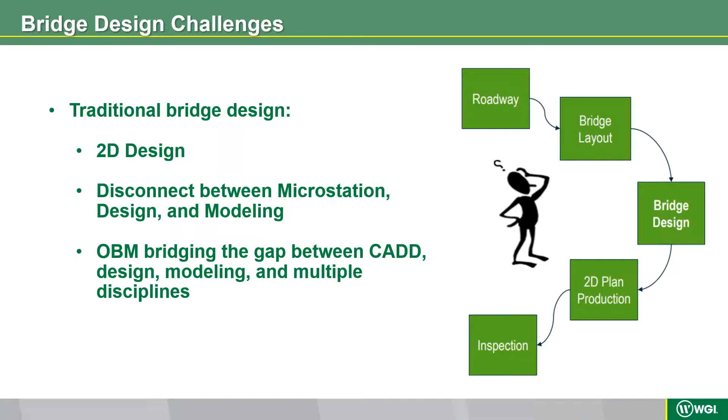The obvious disadvantages of this approach are that there is multiple manual data transfer with roadway and other disciplines, and repetitive data entry between numerous design calculations, spreadsheets, software, and plans. With this iterative process, there is no quick or efficient change management when horizontal or vertical geometry is updated. There are translation issues between CADD, modeling, and design calculations, and there is virtually no automation for CAD production or design.

So OpenBridge Modeler, or OBM, looks to remove the disadvantages I previously discussed and enhance the bridge design process by continuously exchanging project information from initial geometry all the way to final design. This exchange of information includes horizontal and vertical roadway geometry, bridge geometry, and it even includes beam strand patterns and bridge reinforcement. This all-inclusive approach looks to improve decision-making processes. OBM helps streamline real-time collaboration between disciplines, as well as sharing, reusing, and repurposing existing data to minimize risk of design errors, as well as helping to identify construction issues.

The advantages of OpenBridge Modeler are that you're able to leverage existing MicroStation tools such as GeoPak and coordinate geometry. There is automatic horizontal and vertical data transfer between roadways, structures, drainage, and utilities. There are seamless and continuous updates when parametric data is changed, supporting efficient change management. I'm going to be specifically discussing that point later in the presentation.

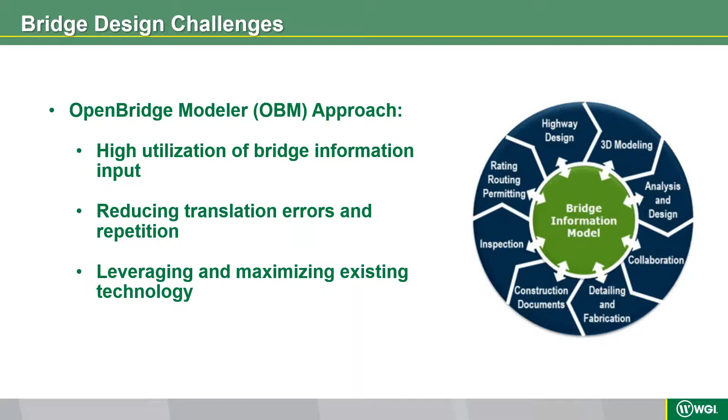You can view your bridge layout in context of the true world. There is intelligent connection to design and analytics, including bridge design, rebar layouts, strand patterns, and vertical clearance. You're able to reuse existing data as well as repurpose that data for additional analysis. All these advantages increase efficiency, which saves time and money.

So these images represent the easy-to-use and intuitive interface of OpenBridge Modeler. This interface is similar to MicroStation and AutoCAD in that the ribbons and toolbars can be customized to meet whatever your preference is. We will discuss some of the primary design analysis and reporting tools, such as input report, create drawings, quantities report, and clash detection. We'll also talk about some of the parametric definitions used to create substructure and superstructure templates.

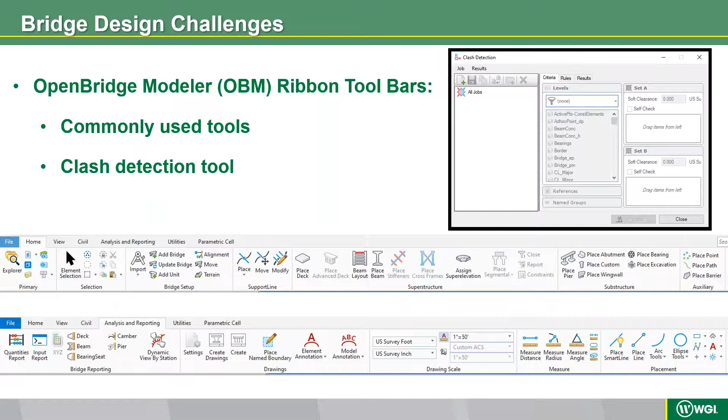Another important tool we will be discussing is the clash detection tool shown in the top right image. The bridge clash detection tool helps mitigate risk by performing conflict analysis between the bridge and proposed or existing infrastructure, which saves time, helps eliminate errors, and reduces project costs. You can view clashes in 3D or in a table format, which can be a helpful tool used to check the model as well as perform quality control and assurance. This tool will also detect clashes with reinforcing steel and other embedments, as well as checking setback and vertical clearance requirements. And again, we will be talking specifically about the clash detection tool later in the presentation.

Throughout this presentation, we will continue to discuss OpenBridge Modeler and its capabilities. But first, I'd like to introduce you to Bentley's latest software, which includes OBM. This software is called OpenBridge Designer, or OBD.

OBD consolidates the modeling capabilities of OpenBridge Modeler and the analysis and design features of LEAP Bridge Concrete, LEAP Bridge Steel, RM Bridge, RM Bridge Advanced, and RM Bridge Enterprise to meet the design and construction needs of all types of bridges. With OpenBridge Designer, you have the advantage of using a single comprehensive package from beginning to end of any bridge design project. You can use one product to create an interoperable physical and analytical model for both steel and concrete bridges that can be utilized throughout the life cycle of the bridge.

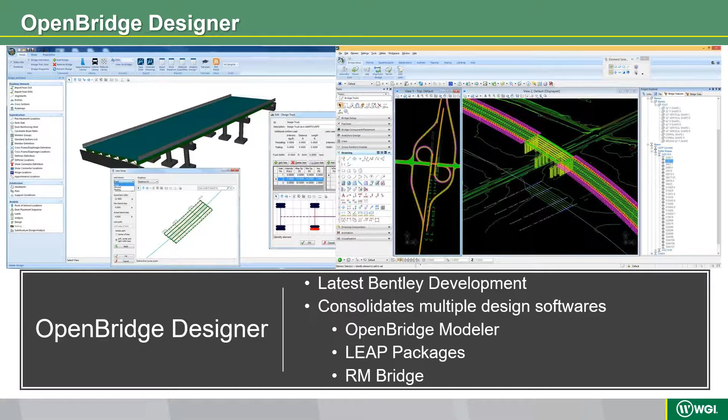The image on the left depicts the design, analysis, and rating of a typical bridge. These programs leverage existing MicroStation tools and interfaces. This is done by reusing civil data obtained directly from Bentley road products such as Geopak, Bentley InRoads, or MX Road, and import roadway information and ground data from XML files. The image on the right displays the capture of roadway geometry and topographic features, similar to the Polk Parkway slides that David will present in a few minutes.

The first thing you'll do when working in a new project is create an OpenBridge Designer file. This file will contain the OpenBridge Modeler files, LEAP files, drawing files, graphics, etc. Once you create a new OBD file, you will choose if your project files will be BIM workflow or standalone. A BIM workflow project must be done in the order of modeling the bridge in OBM and then exporting that bridge from OBM to LEAP.

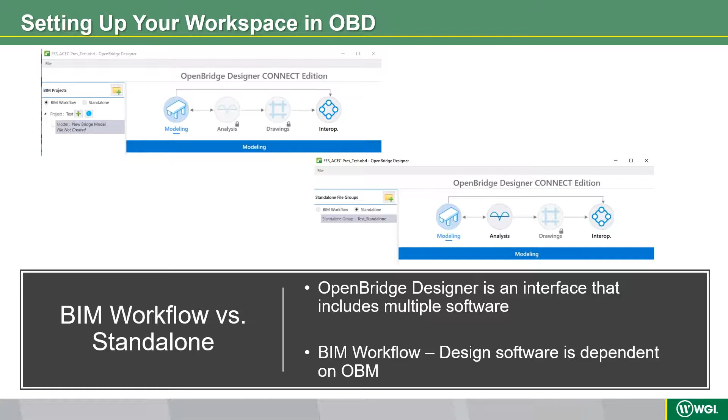Alternatively, in a standalone project, OBM and LEAP can be completely independent of each other, where you can model your bridge in OBM or directly in LEAP. Notice in the bottom screenshot that the analysis button is accessible. You still have the capability to export between both OBM and LEAP, but you don't have to keep the two connected.

Thanks, Callie. So one of the projects where we really got to kick the tires on the software, run it through the paces, and try to use almost every feature of OBM applicable to us is the Polk Parkway Design-Build pursuit. This is one of the example projects we're going to talk about, and this was a pursuit for Florida's Turnpike. We were able to utilize OBM in several different ways, from graphics to design to analysis. OBM allows you to quickly and efficiently develop renderings for LOIs, LORs, and technical proposals.

On this project, we modeled a two-span bridge with skewed substructures utilizing the existing MicroStation tools like Geopak and coordinate geometry. We used OBM to develop our structural quantities by using the bridge reporting tools. OBM can develop various types of quantities like multiple classes of concrete and rebar. You can also use it to develop independent cost estimates by manually setting the cost of the quantity. On this job, we used the FDOT area historical costs and compared prices against the historical statewide averages.

We also used OBM to perform vertical clearance checks using the clash detection tool within OBM. On this project, we were able to utilize one of the unique features of OBM, and that is the ability to use pier or foundation templates developed from previous jobs. I will talk about this feature in more depth in a couple of slides. OBM is fully integrated with ProjectWise, which is a good tool to support distribution with other project teams.

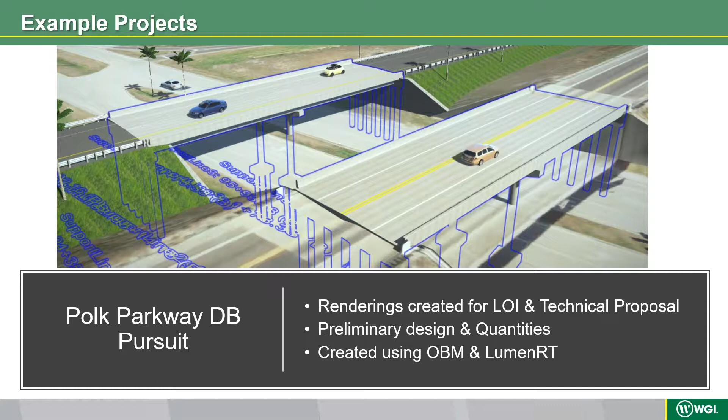One of the big questions we typically get is, how do you check your models? We found several different ways to check and QC 3D models. On this project, we used a bridge reporting tool to print the input report for check and QC of the bridge geometry and design. We also performed a visual review to assure no gaps or holes within the model, especially at the roadway and bridge interface.

It is important to note, in order to develop graphics like the ones previously shown, you must have existing or proposed elevation information. You will use the existing aerials of the surrounding area and drape them over the existing vertical data. Once you've draped the aerials over the DTM, you can export the model to a graphic software program to put the final touches on your graphic. You can add features like different vehicles, landscaping, lighting, and even choose your ideal weather conditions.

Graphic software may be time and computationally extensive and not available to everyone, so another way to develop similar graphics and get the real-world context of your bridge is to save as or export your bridge to Google Earth as a KML. Be sure to set your bridge to the correct geographical coordinate system, or else your bridge may end up in the middle of the ocean. There are also some vertical translation issues between OBM and Google Earth, so you may need to adjust your model vertically. And again, DTM or existing survey information is needed for modeling existing bridges.

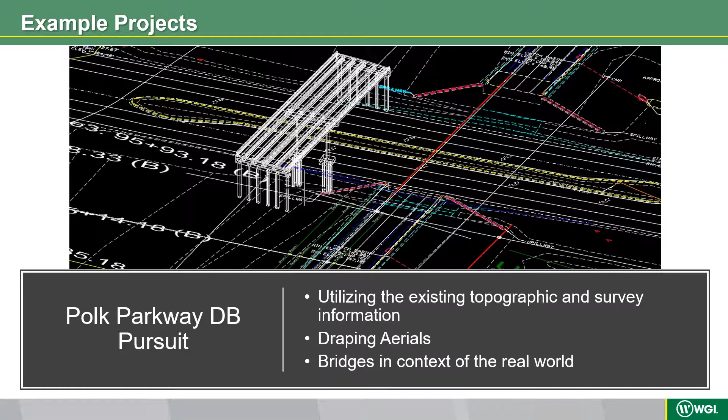On this project, we wanted to analyze a couple different span arrangements as well as vertical profiles. Every change of the vertical geometry has an effect on the superstructure and substructure, as well as the designs of the remaining bridge elements. With each change of the vertical profile made by the roadway engineer, the OpenBridge model handled that change seamlessly, and it also carried that change through to the design software like Callie was talking about earlier.

However, it is important to note that your bridge must be set up using the parametric definitions, or else any updates will not be automatic and will require manual adjustment. Once you've defined the bridge elements in relation to the alignment, the model will update the remaining bridge elements automatically. On this project, the changes were immediate, which obviously increases our efficiency and requires less intensive coordination between structures and roadway.

Another tool shown in the left image was the pier templates. Pier templates allow you to develop substructures quickly and efficiently. This multi-column pier had been defined on a previous project and imported into this bridge model and site adapted. Template-based definitions are simple and easy to use and allow flexibility as you move from job to job. Templates can also be applied to beams and decks, which help when the roadway engineer will make changes to the cross slope or super elevation transition.

Another good feature of this program is highlighted in the image on the right. Originally, the bridge substructure was modeled perpendicular to the superstructure in the proposed Polk Parkway, so there was no skew. However, the decision was made to match the adjacent existing bridge, so we decided to skew the substructure to be parallel to the existing roadway underneath Polk Parkway. We made this decision after the model had been developed.

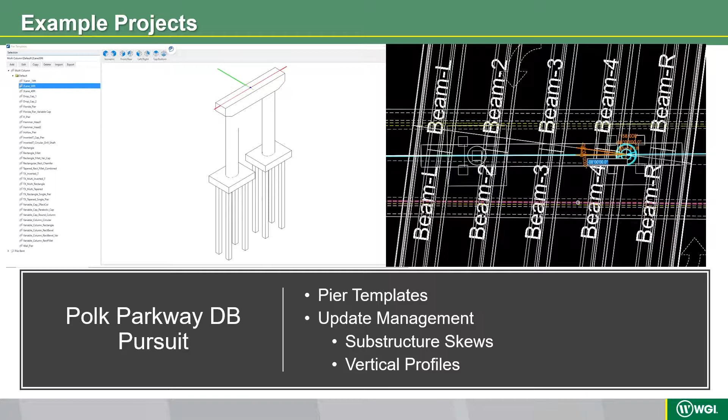Another important note is that when we were modeling the bridge, specifically the bridge superstructure, due to the symmetry of the bridge, we were able to use the Copy To tool to copy superstructure definitions to the remaining span.

Quantities, cost estimates, and bids are an important element of design-build pursuits. OpenBridge Modeler has the capabilities of reporting accurate quantities and quickly turning those quantities into a cost estimate. When you complete your bridge model, you will be able to get the quantities based on your defined superstructure, substructure, and foundation. The quantities report is simple and easy to use.

This tool can be used to evaluate multiple substructure and superstructure alternatives based on your bridge model. You can compare different span arrangements with the click of a mouse. The steps are easy. Once your bridge model is complete with parametric definitions, go to the Analysis and Reporting ribbon, click Quantities Report, and then once within the report, you can import previously defined report formats, or you can define your own format. Once you've settled on a format, simply select your bridge or a unit of the bridge and click Submit. A report will be generated within seconds based on your selections and bridge model.

This report can be used as a quick check on your model. For example, if you have an overly high concrete quantity or there is an outlier in the quantities, then you may need to review your bridge model. The report can also be used to develop quantity plan sheets or be submitted as a standalone deliverable. Currently, OBM does not quantify rebar. However, you can export the report to Microsoft Excel and insert a rebar ratio to complete your cost estimate.

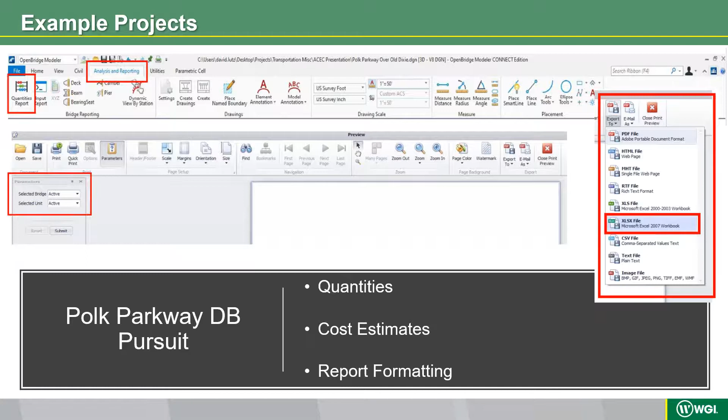The cost analysis tool is very helpful with predefined unit prices. However, there are many instances in which you will want to change the unit cost to get a more accurate cost estimate. There are several ways to change the unit cost, and I've highlighted two here. One way to change the unit price is to export the quantities to Microsoft Excel. In Excel, you can change the unit prices within the individual cells and update the total cost formula to get a more refined total cost. It is important to note that when you export the report to Excel, it will only export as numerical values and will not have any formulas within the Excel. So you will need to update that, and those will have to be user defined.

The second option is to go into the material library and change the unit price within the material library. Once changed, you can save that library, and you can also use it in the future. You can also import a materials library from one that you defined on a previous project or has your unit costs already built into it. And you can also export those as an XML. This is helpful if you're interested in modifying other material properties of the bridge element. As you can see there, if you want to change some of the other beam properties, structural properties, this is where you can do that.

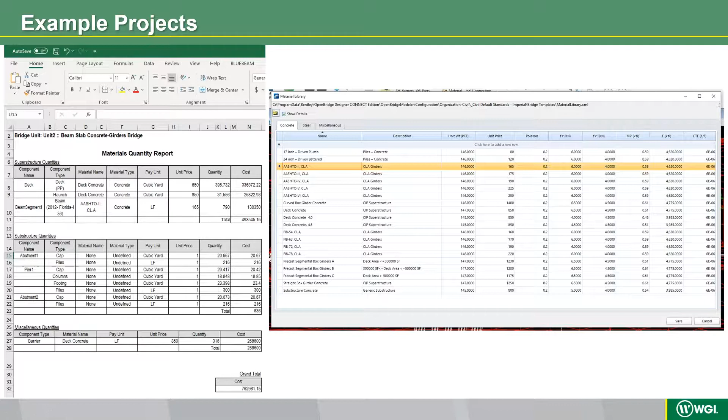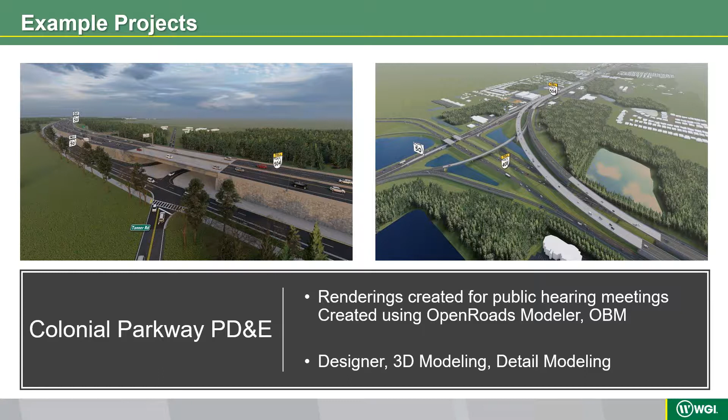Another example project is the Colonial Parkway PD&E. WGI was hired to do the renderings and animations for the preferred alternative of this entire job. We constructed a model that spanned 12 miles and included all the proposed and existing features of the corridor. This is an example of a fly-through of the job. This video spans the first quarter of the Colonial Parkway and has live traffic. In this video, you can see that we modeled all the existing buildings and landscaping.

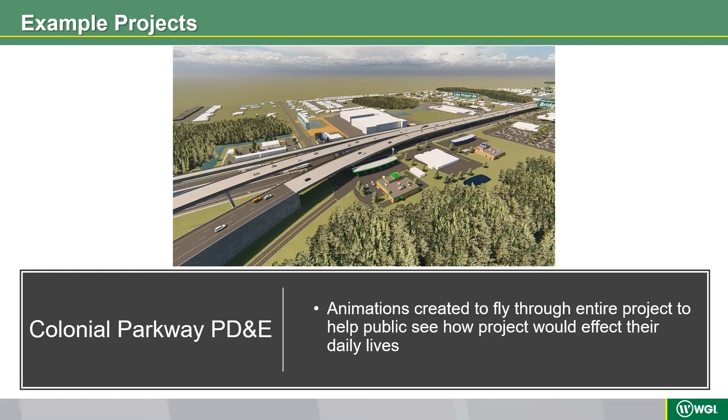We coordinated with multiple divisions to bring this model to life. OpenRoads Designer and OpenBridge Modeler were utilized to bring all facets of the job together. After this video is concluded, I'll go into further detail about how each of the components were brought in to create a master model with all disciplines.

This animation was used for a public hearing to show how the project would impact the daily lives of the public. People could find their street and/or house if they were close enough and see if the project would affect their daily driving pattern. We were given positive feedback from the public saying that this made the project much clearer to them than the roll plots that were arranged around the room did. Animations such as this one will increase public engagement and help answer questions visually. This technology has not only already proven itself useful, but will continue to be very important and beneficial moving forward with social distancing.

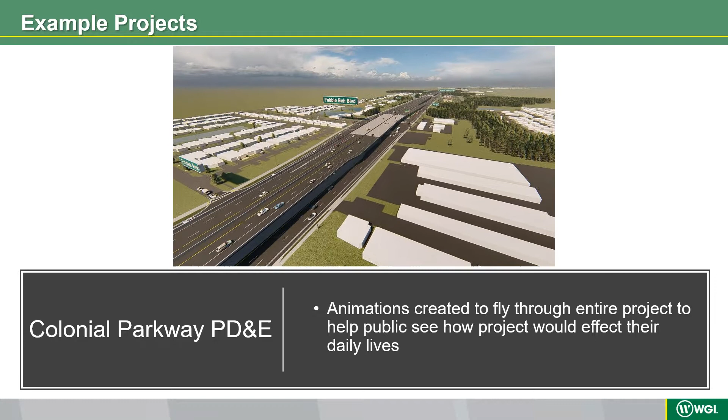The first step in the Colonial process was to use OpenRoads Designer to create the 2D plans, and then use corridor modeling to create a 3D model. Corridor modeling consists of creating templates, which are basically typicals. These templates are then extruded along the alignment and profile to create the 3D model of the roadway and its elements. With these templates, we can model the entire roadway, barrier walls, MSE walls, guardrails, and more.

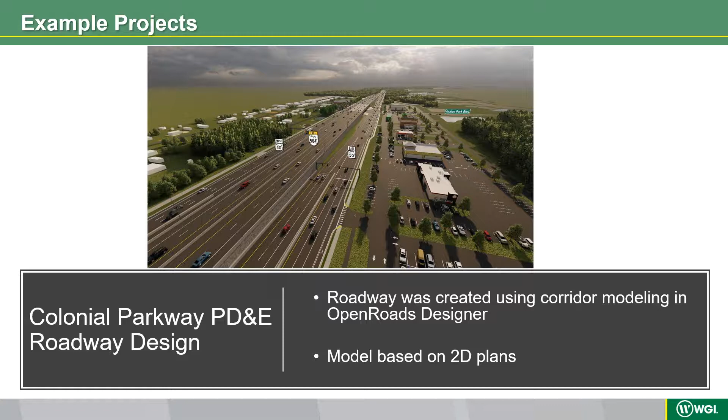OpenRoads has a quantity component tool similar to OpenBridge, which makes it very easy to pull quantities from each corridor and give an estimate very quickly. Similar to OBM, OpenRoads has the capability of tabulating quantities for specific components throughout the project. The second step in the process was to create the bridges, which was accomplished using OBM. Once these bridges were modeled, they were referenced into the 3D OpenRoads model.

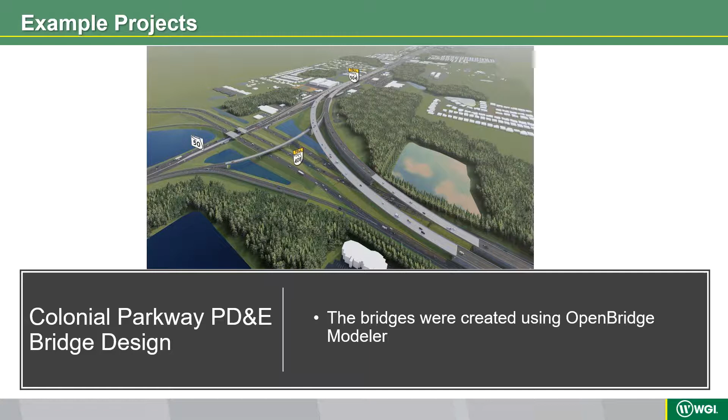The third step was to coordinate with signing and pavement marking division to get their line work and sign locations. The pavement markings were applied using a stencil tool in OpenRoads, which will take your 2D line work and overlay it onto your 3D model. The signs were coordinated to go in the correct location and with correct elevation. All signs were created using guide sign software and manipulated to appear on the sign panel in 3D.

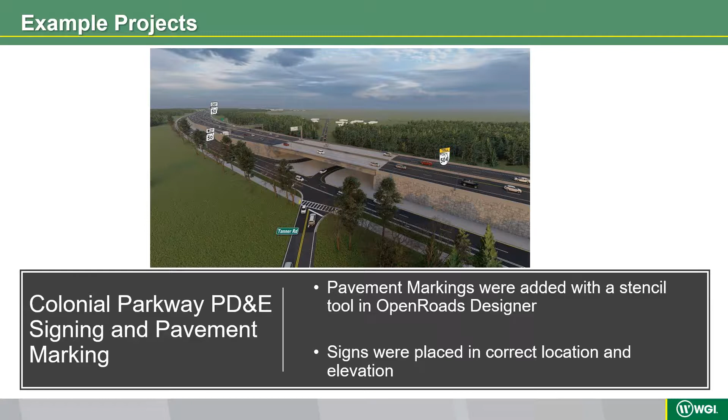The fourth step was to construct the toll gantry and toll gantry site. Due to the Turnpike general tolling requirements, frequency, and vibration design criteria, the toll gantries were modeled utilizing a finite element software with the necessary design capabilities. It's important to note that OpenBridge and OpenRoads are not able to analyze or design toll gantries.

Once the model and design were completed in the finite element software, we were able to export the 3D model to a MicroStation file and reference the MicroStation file into OpenRoads. Once the toll gantry was in OpenRoads, we were able to place it in the correct geometric location. Since OpenRoads and OpenBridge are able to relate to the real world, the gantry is represented in true context of its location. OpenRoads can be utilized to verify the toll gantry is meeting the horizontal and vertical clearance requirements with the roadway horizontal and vertical profiles.

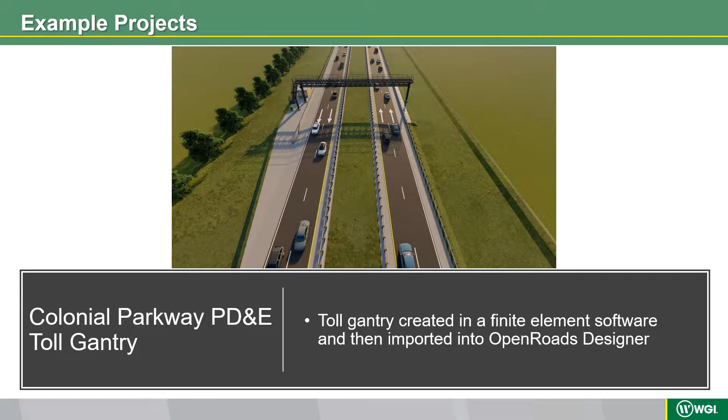The last step is to create the surrounding areas of the model. For this, we use 3D freehand techniques to create the existing buildings and the existing terrain. You'll then export your model to rendering and animation software, such as LumenRT or Lumion, where you can create still photos or long animations of your model. If you have exported your model to LumenRT and have already added objects such as people or cars, but you need to make an update to your road or bridge, you can make these changes and re-export them into Lumen without impacting any changes you made within Lumen.

Most animation software are also able to produce cubes. Cubes are a reduced version of your complete 3D model in a single file that can be delivered to anyone, whether or not they have the animation software on their computer. Within these cubes, the user is able to zoom in and out at any location along your model.

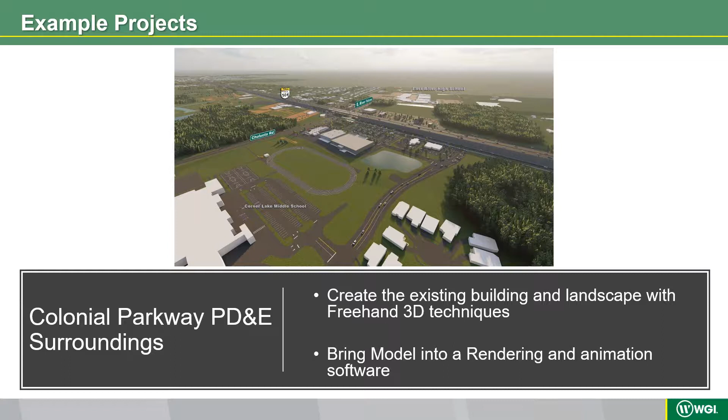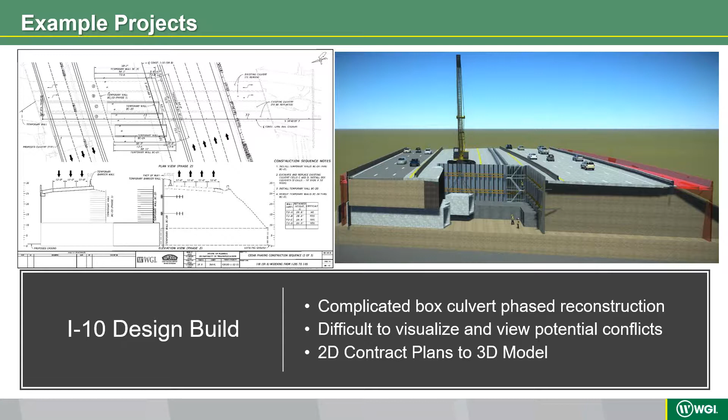As you can see, the 3D image on the right side gives a much clearer picture of what's happening during this phase of construction than the 2D image on the left. The 3D image helps show how traffic will continue to flow while this construction phase is taking place. These renderings can help foresee problems that occur before construction even begins.

So here's a look at the graphic in OBM before you export it to LumenRT. OpenBridge Modeler's freehand 3D modeling tools, which are shown in the screenshot below the graphic, were used to model the box culverts and temporary walls and anchors. OpenBridge makes it very easy to create miscellaneous objects at correct elevations and dimensions using the Civil AccuDraw tool shown on the bottom left of the taskbar screenshot.

Within the OBM drop-down menu, the modeling menu has multiple tabs to help create solids, such as a box culvert in this example. First, a line was drawn from end to end at the invert elevations using the Civil AccuDraw tool. Then a 2D box was drawn at one end of the line to represent the outer shell of one of the culverts, and then it was extruded along the line to make a solid. Using the shell tool, the solid was hollowed out from end to end with a 10-inch thick wall.

The anchors were created by drawing a single anchor in a separate model, saving that anchor as a cell, importing the cell into this model, and then once the anchor was placed appropriately in one position, it was extruded along a baseline that represented the sheet pile walls. The sheet pile walls were also created in a similar manner. I would like to point out that OpenBridge Designer does not handle anchor walls or box culvert analysis.

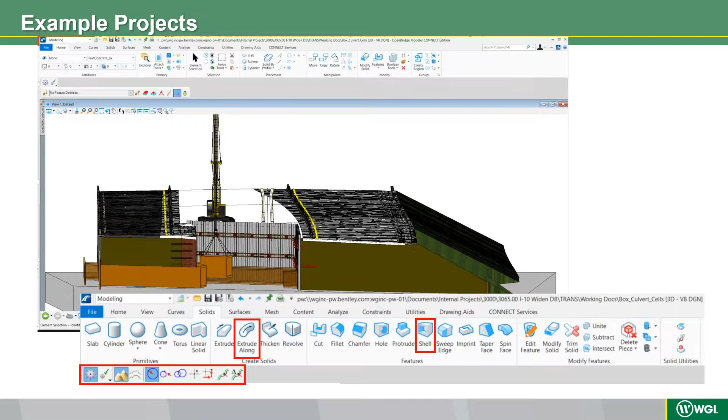Once the model was exported back into LumenRT, we were able to change material features such as the existing roadway pavement versus the proposed roadway pavement, the existing box culverts versus the proposed box culverts, and the soil. We also added vehicles and construction workers.

To give the reviewer an even more in-depth idea of what's going on in this graphic, we added in red the roadway width that was proposed in the RFP. This clearly shows the cost savings that our proposed design offers compared to the RFP design.

An important item to note here is how the MSE walls were created in 3D. MSE walls are created with templates in OpenRoads Modeler, not in OpenBridge Modeler. Since the roadway engineer has control of the templates within OpenRoads Modeler, coordination must be done between the roadway and structural engineers.

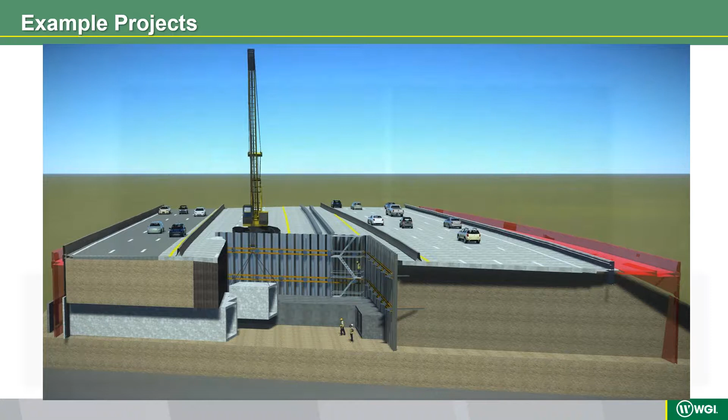The view on the left represents the profile of a leveling pad from this project. OBM has a tool called Open Profile View, which allows the designer to select any smart line in plan view, as shown in the view on the right, and view or manipulate its profile. Once you are in the profile view, it not only highlights the line in plan view that you're evaluating, but also points to the corresponding plan locations when you are using tools in the profile view.

During this project, the roadway engineer was able to provide coping elevations, ground line elevations, and wall offsets to the structural engineer for the MSE walls. The structural engineer created profiles in OpenBridge Modeler for the leveling pads at each wall.

The roadway engineer is then able to attach these profiles to their templates so that the leveling pads follow the correct profiles in the model and consequently in the cross sections. If the profiles were ever updated, the model in OpenRoads would automatically update to fit the leveling pad profile.

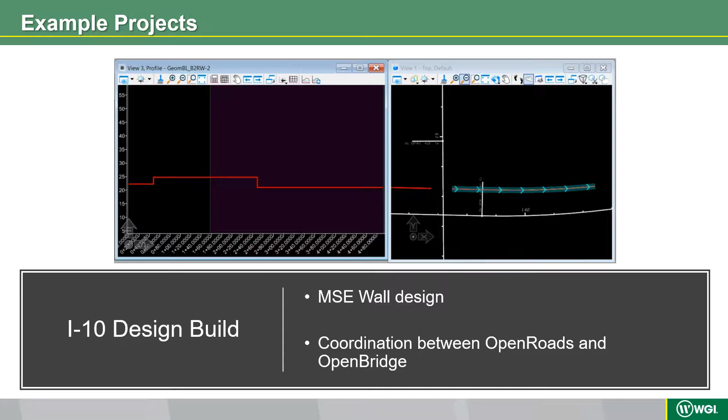Thanks, Callie. So as we all know, 3D models help us evaluate complex situations that can be easily missed in 2D plans or in 2D views. On this specific project, I-95 Commercial Boulevard over Andrews Ave, we are going to highlight the clash detection tool and checking vertical clearance.

On this project, the proposed bridge we were modeling had concrete beams supported by a concrete hammerhead pier over multiple existing roadways in South Florida. Each of the existing roadways has their own existing profile, which made the vertical clearance check not as straightforward.

After we developed the OpenBridge model, we brought in the existing roadway digital terrain information provided by our survey team, and it confirmed what the as-built plans were showing us, in that each roadway had different vertical profiles.

We performed the vertical clearance check using the clash detection tool, again, without performing external clearance calculations and doing repetitive data entry. This is going to be difficult to visualize if you're not meeting vertical clearance in a 2D view or in a 2D plan sheet. With the clash detection tool, we were able to quickly verify vertical and horizontal clearances.

It is important to note that you must user select objects and manually set the clash check criteria definition to whatever you want to check it against. So in this situation, 16.5 feet for vertical clearance. You can set this to any definition that you want. If you want to maintain existing vertical clearance at 16 feet, or if you wanted to check a sign structure at 17.5 feet, you can do that as well.

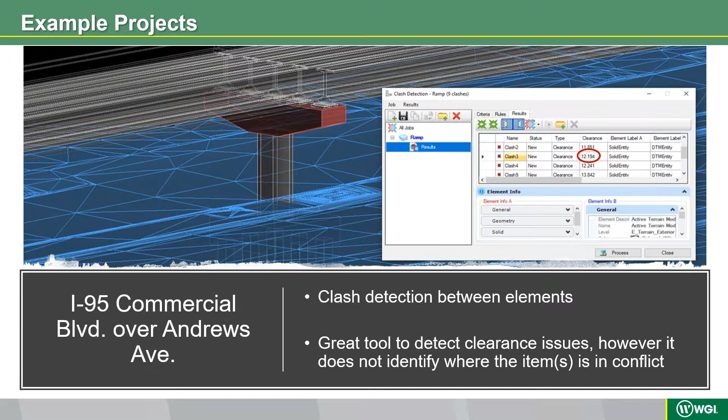So on this slide, we wanted to demonstrate a few of OBM's graphical capabilities. On these example projects, we were asked to develop graphics to show both aesthetics and utility conflicts. The image on the left is State Road 91 widening from Golden Glades to Broward County.

On this project, the client asked us to depict the overhead power lines, the subsurface utilities, as well as their proposed aesthetics. The aesthetics were a very important part, especially to the public, so there's a big public factor on this project, and that's exactly why our client asked for this graphic and this model depicting the bridge aesthetics.

The freehand 3D modeling tool that Callie was previously talking about was used to depict both the bridge and the wall aesthetics you see here. The image on the right is from our FTE pilot project.

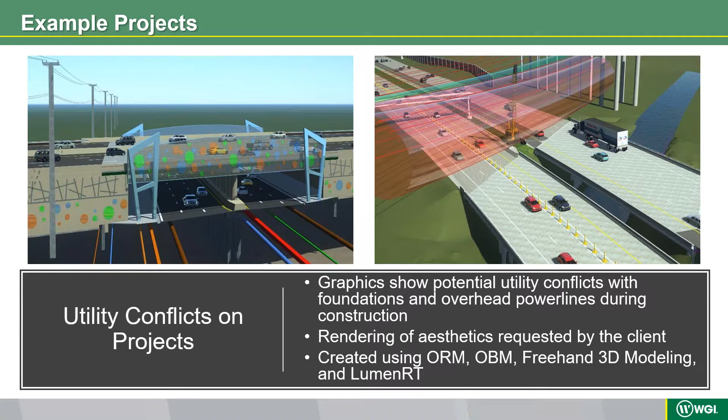This graphic demonstrates sign structure erection in proximity to existing overhead power lines. The overhead lines were modeled using existing DTM and LiDAR technology. We referenced that information into our OpenRoads file, and then within OpenRoads, we were able to create the transparent halos around the existing power lines and use those for vertical clearance checks and horizontal clearance checks. The green halo represents compliance with the clearance requirements, and naturally the red halo represents non-compliance with the governing criteria.

One of the add-on programs that Bentley offers is called Pro Structures. Pro Structures add-on creates accurate 3D models for structural steel, metalwork, and reinforced concrete structures. It allows you to create design drawings, fabrication details, and schedules that automatically update whenever you change the 3D model. This program can develop plans, details, sections, quantities, and cost estimates. Concrete objects such as footings, columns, beams, and slabs are automatically recognized for the appropriate tool in Pro Structures.

We utilized this software on a turnpike project on the HEFT from State Road 836 to Northwest 106th Street. We used the program to model in detail a concrete inverted T, which lends itself to complex rebar layouts, where detailing and verifying clearance requirements is very complex. It should be noted that in order to utilize the clash detection, the applicable design criteria like AASHTO or the IBC you are trying to check the rebar clearance against must be manually defined in the program. The program does not currently have the design criteria loaded into it.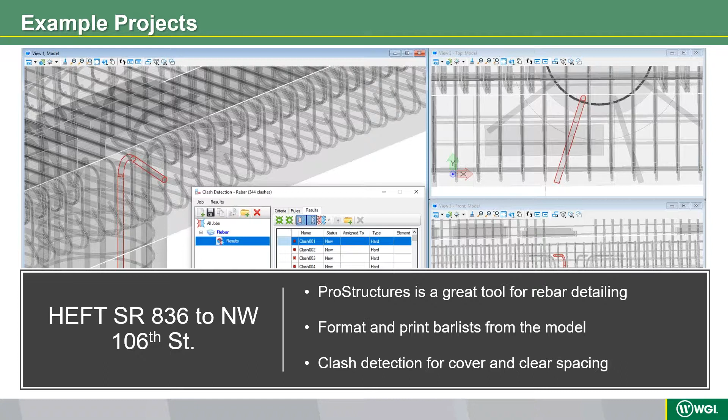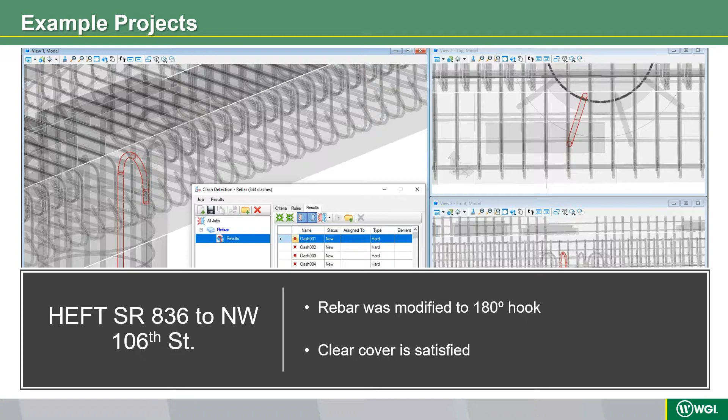We ran the clash detection tool within ProStructures, and as you can see, the tool identified a clash and manually described clearance requirements as shown by the red highlighted reinforcement. In the next slide, you can see where the red highlighted reinforcement was manually modified to a 180-degree hook. The clash detection tool was rerun, and the user input clearance requirements were met and no longer detected a clash. This program allows you to analyze in profiles, elevation, and cross-section views with solid and transparent options to help you explore areas with complex geometry.

Now we're going to transition to talking about some of the challenges and lessons learned from our projects, pursuits, and even our designs. The first design challenge we wanted to talk about is how existing bridge information, digital terrain models, and bridge widenings are a little bit cumbersome within OpenBridge Modeler. So previously, structural engineers relied on as-built and 2D surveys to help determine existing bridge geometry. For bridge widenings, the traditional process started with recreating the existing bridge in 2D CAD using the as-built plans, and if we were lucky, we would also have topographic information.

Now, once the existing bridge model is complete, we can compare the 3D DTM and LiDAR point cloud against the as-built plan. And once you finalize that model, it's ready for final design. For the existing bridge model, the DTM of the bridge deck surface is utilized to establish the existing top of deck elevation, the bridge's cross slope, the coping limits, and the begin and end bridge limits. This refinement in a 3D environment improves the accuracy of the existing beam locations, top of deck elevation, substructure geometry, orientation of exposed pile foundations, as well as proposed drainage, existing drainage, and utilities. These are all key elements in a typical bridge widening project.

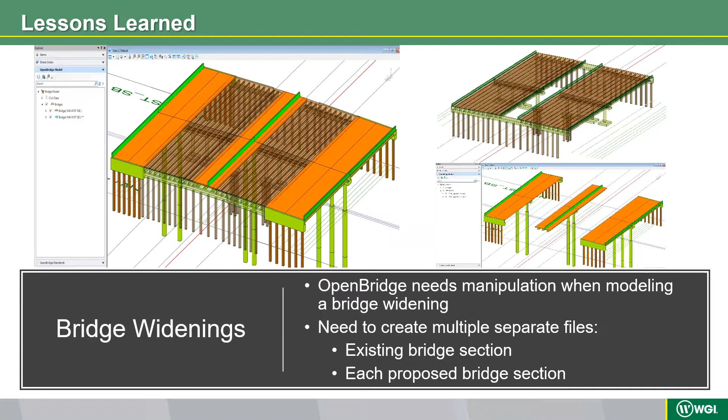So as Callie presented earlier, Bentley's latest software development is OpenBridge Designer, or OBD. Due to the newness of the software, we have limited experience using this on current projects or pursuits. However, we have been able to demo it pretty extensively.

The software is a combination of OpenBridge Modeler and LEAP Bridge design softwares like LEAP Steel and LEAP Concrete, like Callie had previously described. The program combines several supplemental programs into one product, which reduces repetitive data entry, and it will also reuse and repurpose other discipline data, which increases efficiency and saves time and cost.

This software is preliminary and has been relatively untested by the mass market, so there may be additional bugs or obstacles to overcome, but so far our use of the program has been relatively seamless and efficient without too many crashes or corrupt files or lost effort, and we're seeing some pretty good translation between the programs.

One important note is that when exporting from OpenBridge Modeler to your analysis software like LEAP Concrete or LEAP Steel, you will receive the model transfer report. The model transfer report gives a summary of the assumptions and translations between the different programs.

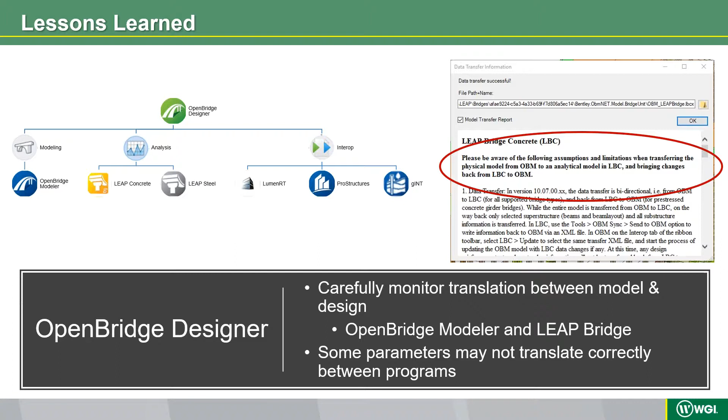One of the important topics that we wanted to cover was plans production capabilities of OpenBridge Modeler. However, it's still in the beginning steps of development. FDOT recently released the CADD manual updated to support the FDOT design manual for FDOT Connect and FDOT 2021 C3D. However, like David mentioned earlier in the presentation, the plans production process has not yet been finalized nor perfected.

The beta FDOT OBM Workspace release is not intended for production, so in the meantime, this baseline work can then be copied into an FDOT CADD workspace, manipulated, and modified to meet the FDOT CADD manual standards. Similarly, substructure and foundation baseline work and base files can be developed using the Create Substructure Drawings tool found under the same Analysis and Reporting ribbon. Again, like the superstructure, additional manipulation will need to be performed.

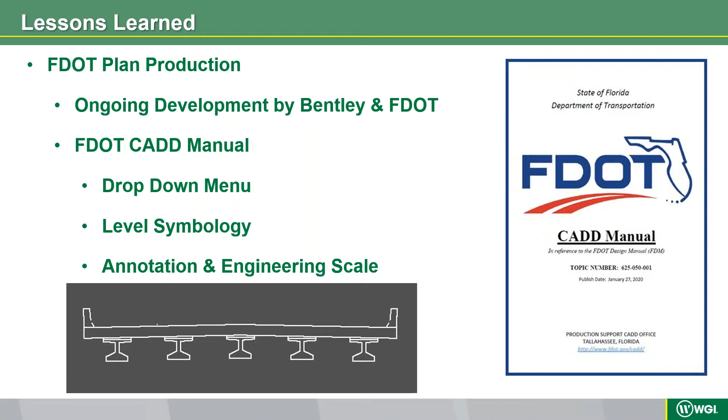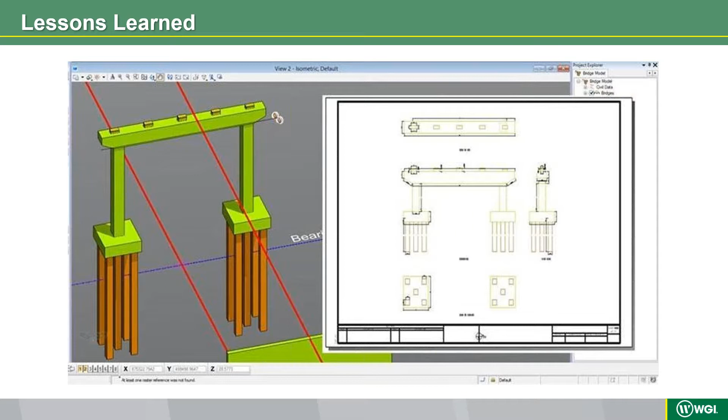Obstacles that are needed to overcome. So one of the biggest obstacles, and for very good reason, is the generational pushback. We've encountered a hesitancy to fully adopt a 3D bridge model as the main source of design in plans production. There are many in our industry who have been using the traditional bridge design method for many years, and trusting a new process is difficult. There's also the learning curve associated with a new program and fully buying into a full 3D design software.

We found, as with any new software, once we've been able to compare the OBM results with our existing spreadsheets or our existing tools, the hesitancy that we initially encountered begins to dissipate. Switching the entire process to 3D is difficult, and it definitely has its own issues associated with it. It's a different way of learning and visualizing plans, and that's not easy.

There's also the obstacle of staying up to date with the most recent developments in this advancing technology. Bentley is constantly releasing new updates, new versions, and especially with the plans production side of it, they're constantly trying to get better with their workspace. With that being said, we found some issues with the use of newer and older versions of the same software. So the same OBM, the same OBD, but different versions. We've experienced this within WGI as well as when coordinating design files with other consultants.